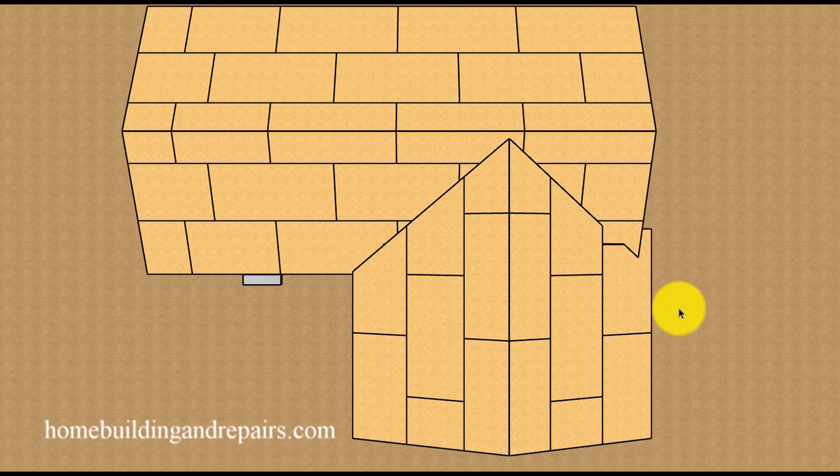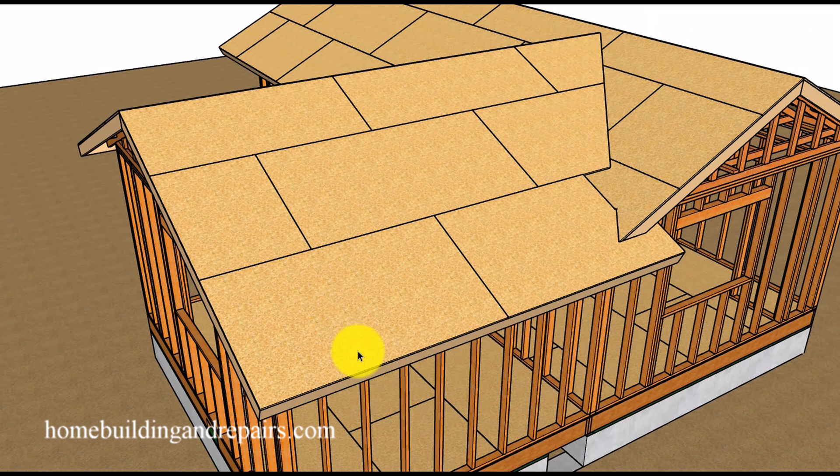Here is another video, and I know that you think it's going to be the last one in this series, but it's probably not. I'm going to do some modifications to the roof and even provide you with the roof in the original plans. Now, in this video here, we have a 6-12 roof pitch on the existing house, and in order to lower the ridge, I went ahead and made this a 5-12. And again, I will provide you with information about the original one.

Now, the first thing I want to do is take apart the roof and provide you with some views of that, and then we will put the roof back together. And even though you're probably not going to get this cut, you might be able to. A lot of times I have to build the roof and then have this a little bit lower and then get my saw and cut it. And of course I'm doing that because it's going to be easier for me. However, you can use whatever you need to accomplish this feat.

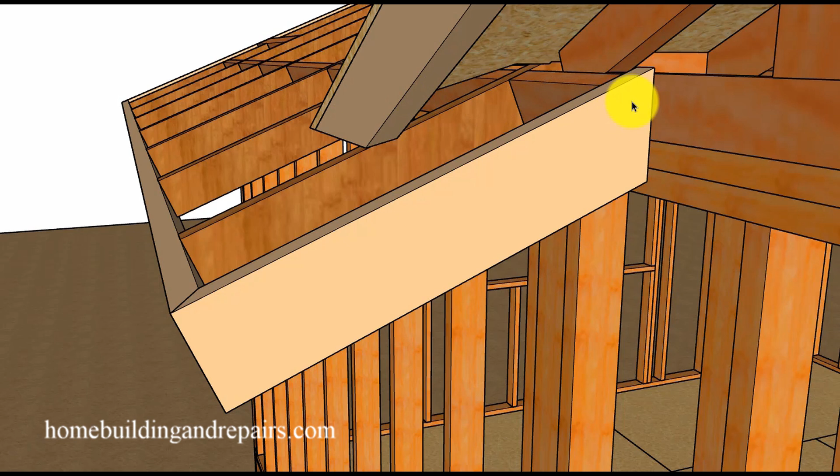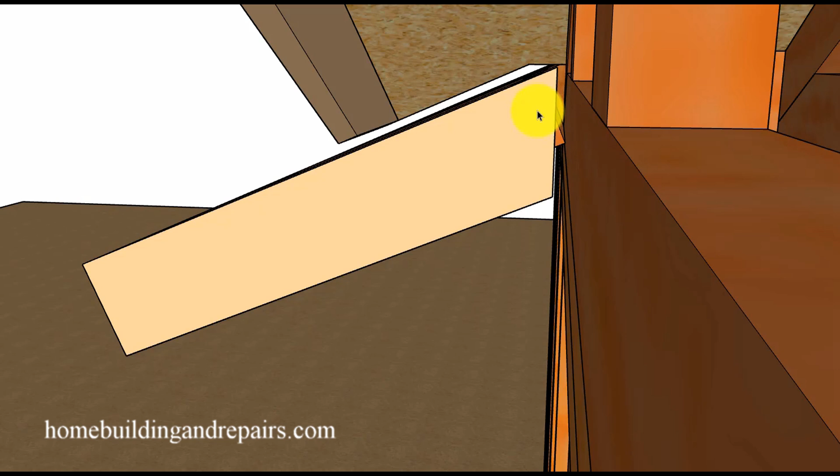And I also wanted to point out that I ran the row of blocks through here to pick up the edge of the fascia board here. And I usually leave a gap. If this is going to be stucco, I like to have about 1 inch. I don't really want the wood buried in the stucco. And you could nail the block into the framing after you put your waterproofing membrane on. And then of course the block can be nailed into the fascia board so that the fascia board at the edge will be a little more stable.

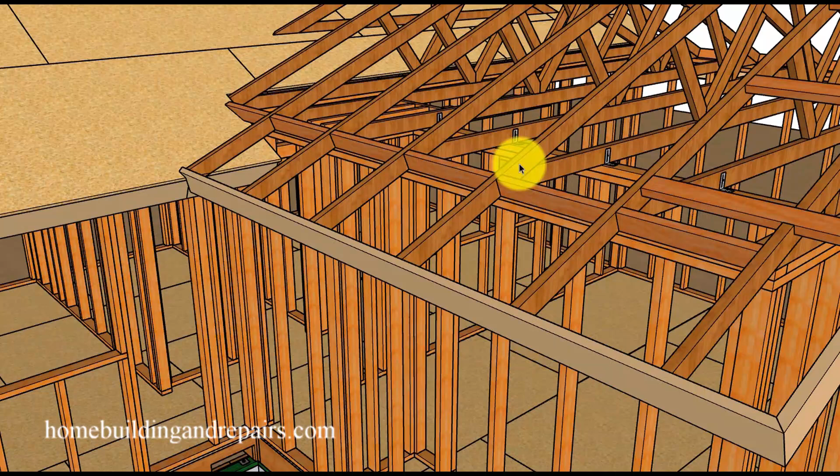And of course we have our gap here so that the plywood will be able to slide underneath this, along with a bottom view of the overhang. You can see where all the blocks are, and of course our lookouts. And we are using a roof truss system, and I would imagine if you're going to be building a 12-foot wide or a 16-foot wide building, you might be able to order trusses that are already made or prefabricated, but you might not be able to order all of these components.

And of course, here's what happens if we change the pitch of our roof and keep the same overhang. However, you can have the overhang match as long as you extend the roof rafters out far enough. And of course, you don't need to do that on the other side, but you will need to do it on this side.

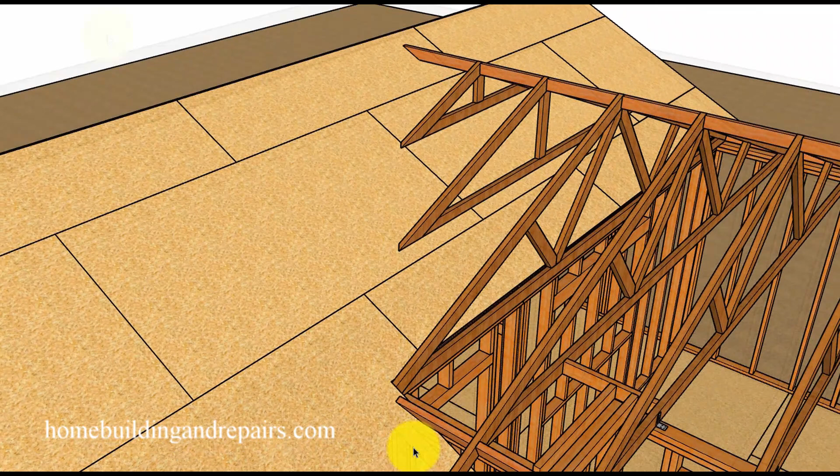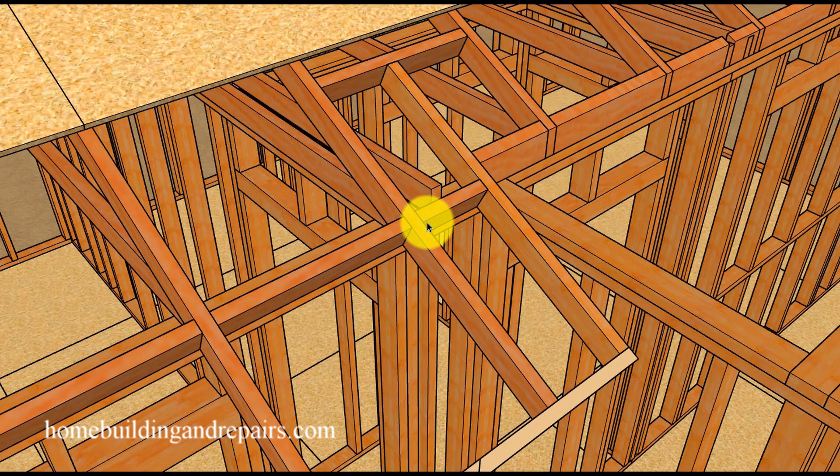Next up, let's go ahead and remove the trusses and the sheathing here so that we can take a look at a row of blocks we're going to need to install, along with this roof rafter that's going to need to be installed. And you can run this farther back if you want to, or even break the center of the block on the seam here to get nailing. But you are going to need to finish the end of this roof off somehow, and this is usually going to be the best way to do it.

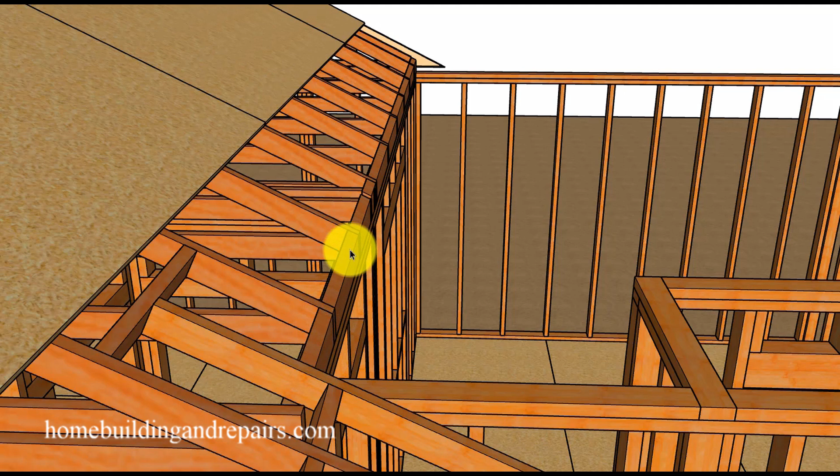And again, I'm leaving my inch gap here for the stucco or the siding, and you might not need to leave that, or you might need to leave a bigger or smaller gap. And of course our shaped blocks so that we can get some nice perimeter nailing for the existing roof. And of course you might have a building where these blocks were already installed and you won't need to install them.

In a view of the corner here, don't forget that this right here was one of the lookouts that was supporting the fascia board. And of course we will need to put a strap here to connect the two top plates together, if I didn't mention that in the other video.

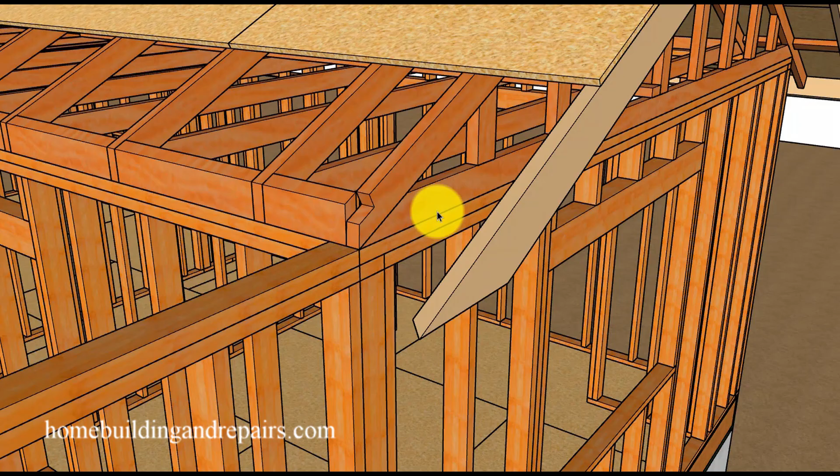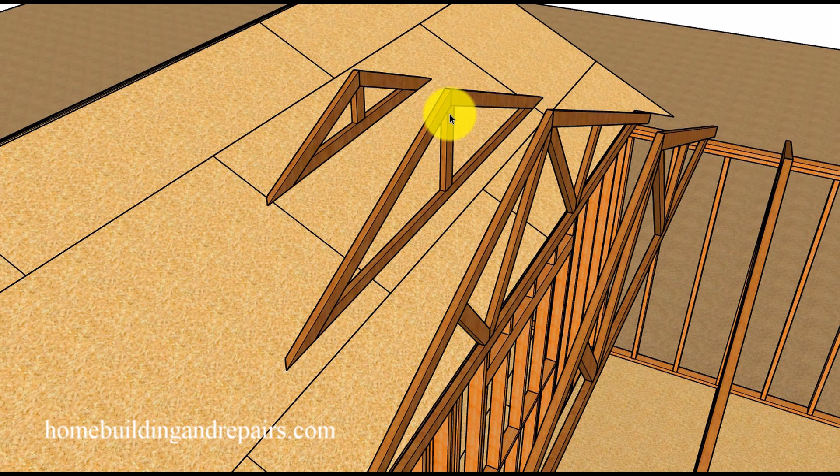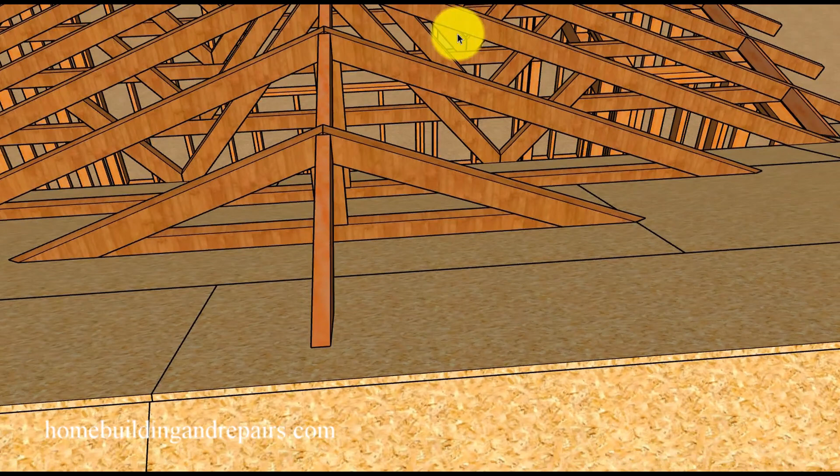Of course, a view from the top, fill our sheathing back in, and then we can put our trusses on. And even though in this video I'm not going to provide you with information on how to position these trusses, I will try to make another video and put a link here when I'm done with it. And of course our ridge blocks there, along with a view down here to create a nice straight line for our valley. And a view on the other side, nice and straight.

And a view of the trusses with the blocks and the notches cut for our lookouts. And now would be a good time to point out that this method of construction might not be approved in your local area. And if that's the case, you will need to check with your local building authorities to actually find that out. And that would be local contractors, engineers, architects, or your local building department if you have one.

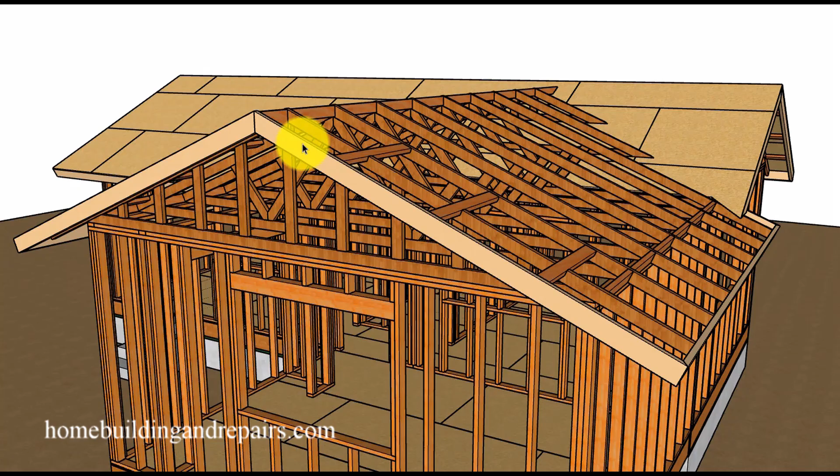Next up, let's go ahead and install the fascia board. A view of the corner here and our blocks. A view of how the outlookers are going to support the fascia board. And the outlookers are spaced 32 inches on center. Another view of it there.

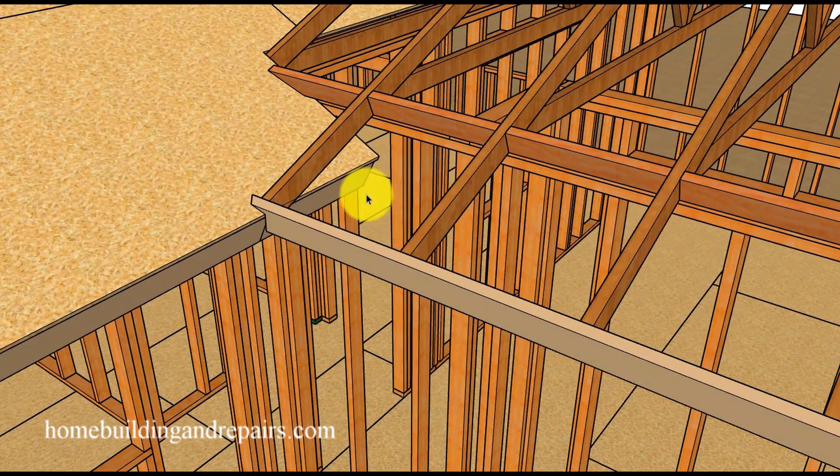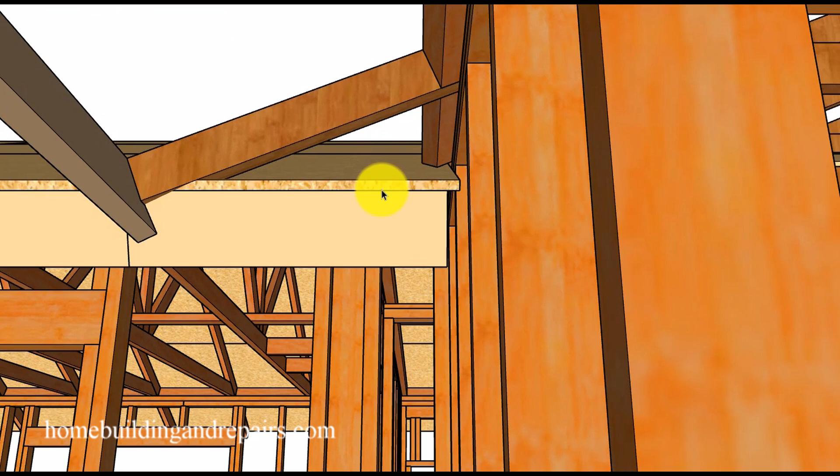Zoom in on this area here, and you can see where this section here will be seen from the underside of the roof here. So this is actually going to have roofing on it, and all of these components might need to be modified for all of the metal flashing and the roofing that will be installed along with anything else that might be in the way. You need to waterproof this section so that we don't have any leaks, and of course the board that you installed to make everything underneath look nice.

And of course we will need to install some type of ceiling backing, and this ceiling backing will be nailed to the trusses and be able to float with the trusses. Now I have a 2x4 on here, and often in my videos you will see a 1x4 or a distance provided so that the roof trusses can move up and down. However, with the short span that we're working with, 16 foot, I don't really see a problem doing something like this. However, this is just my personal opinion.

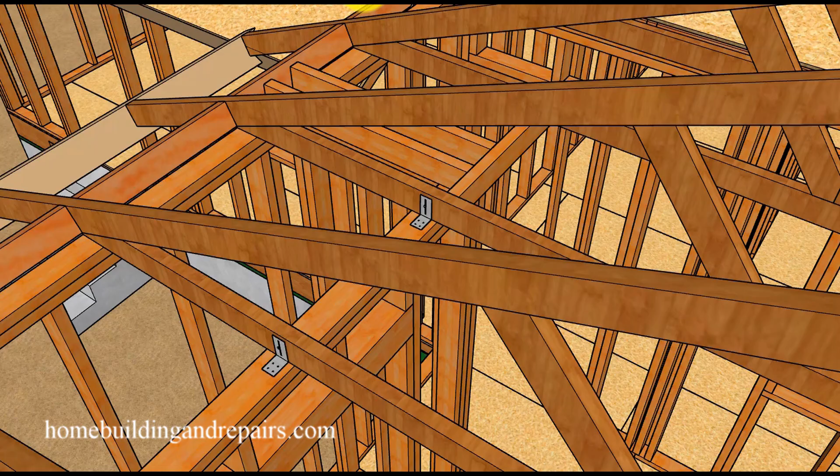I will leave it up to you to figure out whether or not you just want to toenail the trusses into your framing or install a top plate that is going to be a little bit smaller and give the roof trusses room to move up or down if needed. And I know some of you are thinking, wait a minute, it's not going to move up, is it? Well, according to some of the things I've seen about truss uplift, I wouldn't plan on ruling that particular option out. And of course, the ceiling backing for this corner here will be the truss over here, and the new roof truss can be nailed into the blocks and the existing roof rafters also.

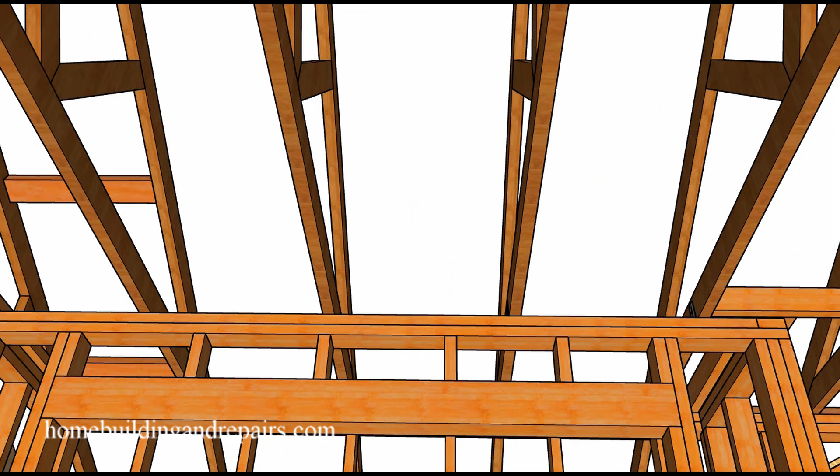And a view of the closet drywall backing for the ceiling in the corner there. And of course, we're going to need some drywall backing here. And you can simply nail a 2x4 on top of the wall framing to pick up the drywall there. And you will need a center support brace. And of course, this board here will stabilize the bottom of the roof truss.

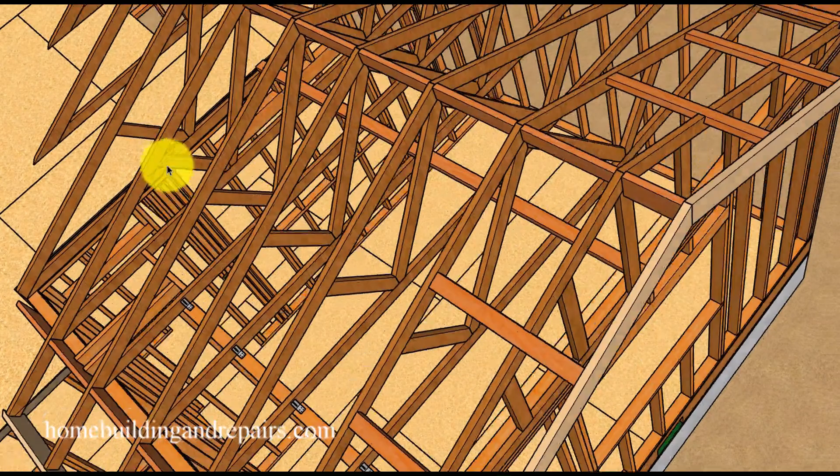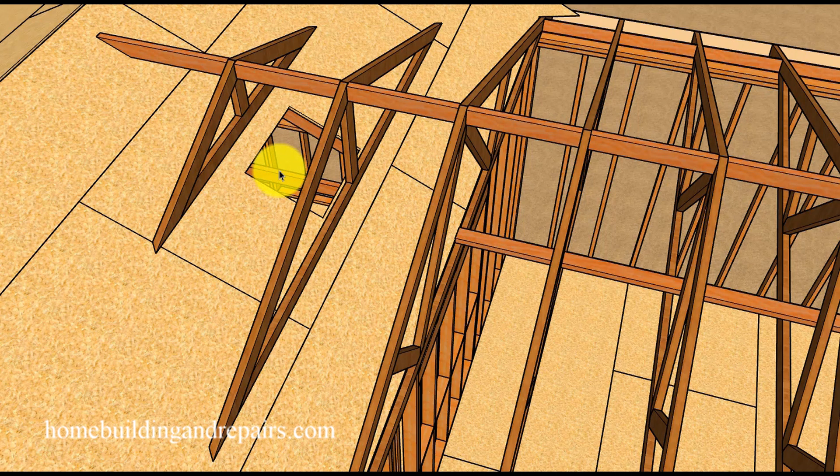And of course, you will need a ventilation hole. And that's going to provide you with cross flow ventilation, especially if you have a dormer roof vent or gable vents at the other end. Now this might need to be access from the existing attic to the new attic, and if that's the case, the hole is going to need to be large enough for someone to crawl into this area, and that's usually going to be about 23 inches by 23 inches roughly.

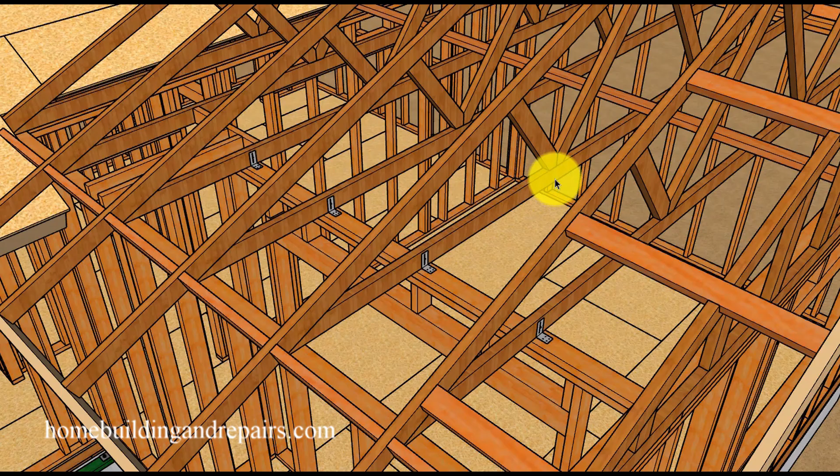And some of you are thinking, hey, wait a minute, I'll put an access hole in the closet, and you can see here that there's no way you're going to be able to climb up through here, so that's probably not going to be an option. If you were going to put an attic access hole in here, it would need to be a little further into the center of the ceiling, and that might not look nice.

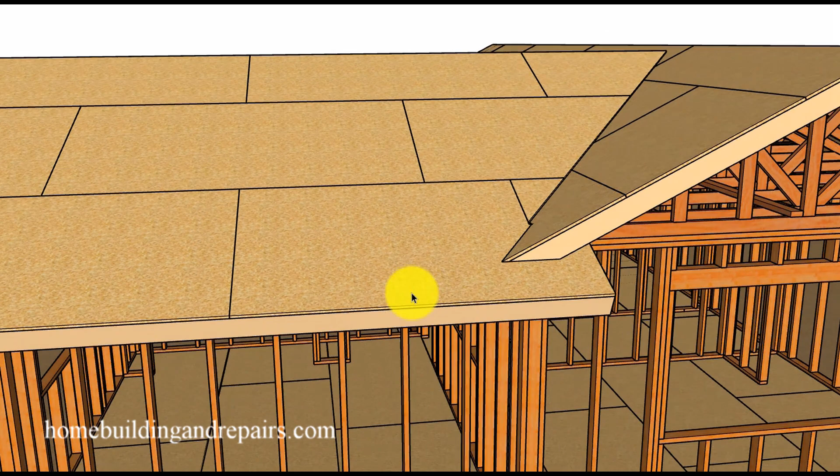And of course, we can install our roof sheathing, and again, let's not forget to leave enough space, and I didn't do it here because I just wanted to provide you with another example along with the two different roof pitches. Remember, this is a 6 and 12, this is a 5 and 12. And of course, some of the problems that you could run into if you change the roof pitches. And I will leave it at that.